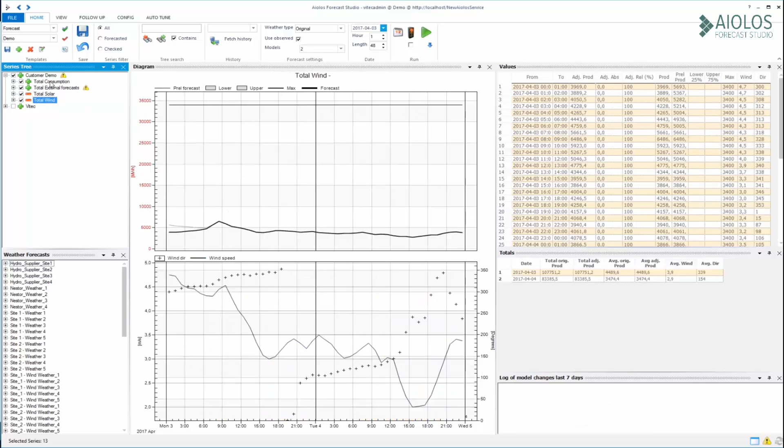But let's take a look at this consumption forecast. The consumption forecast itself contains forecasts made in different geographical areas, area A and area B. And each of these consists of different forecasts.

In this case we've made the same forecast, the forecast for area A, but we made it in two different ways. We've used the calculation model Aiolos for one of them and the calculation model Cilia for the other one. Here you get to see them all in the same diagram, so you can compare what Aiolos thinks versus what the Cilia model thinks in this case.

And then you can weight these two together. So in this case we have 60% of the Aiolos forecast and 40% of the other. And this we have set manually, but you can let the system calculate what would be the optimal weight looking at a historic period and set these weights from that. And this could be internal forecast like it's today, but it can also be that you want one of them to be an external made forecast made in another system. So you can still use them like this.

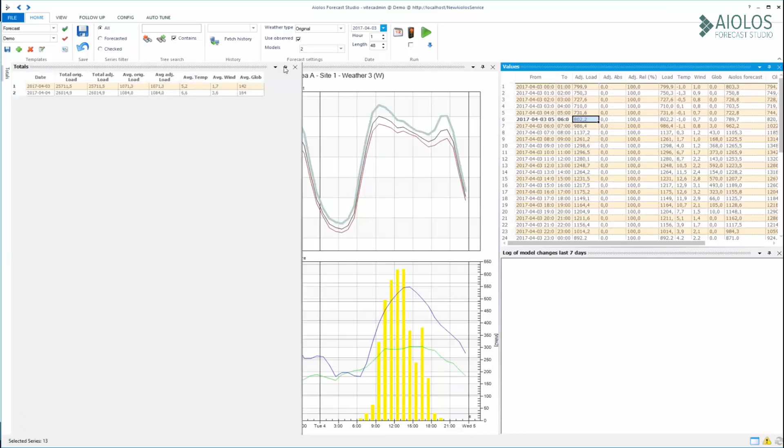But what we see here, everything is configurable. So let's say that you don't want to see the totals, then you can move them away like that. I pushed the needle button, and if you want to see it, you have it there, and if you always want to see it, you can pin it back again. You can also adjust all the windows, so if you want this to be larger, you can just make it larger. Or if you have multiple screens, you can rip this out of the rest of the container and put it in full screen mode if you want to see that instead.

So this should be able to optimize according to how you want to see it.

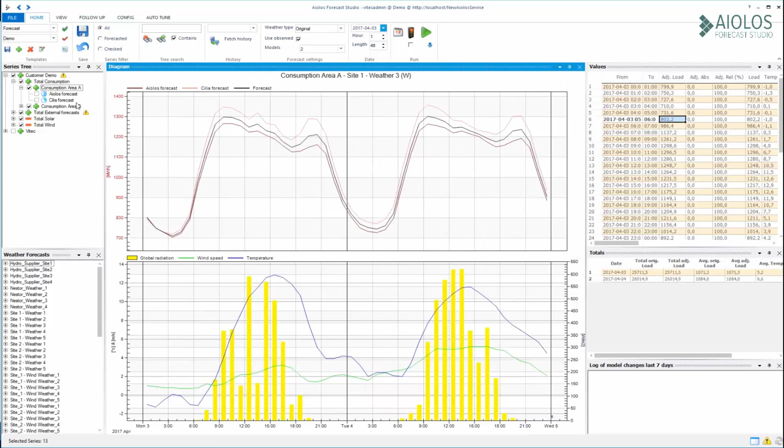But let's go forward then with the forecasting process, and let's say that you want to make this Aiolos forecast. So one thing that you might want to do when you made this forecast is compare it with the historic data, and then you can add this data. In this case we had real-time measured data, so we had data up until now. In many other cases it might be that we don't have data for the last days, weeks, or even months sometimes. So that depends on your setup and what you have. But Aiolos is supposed to manage all of that.

So here we took a look at the last 2 days, and we see that our forecast is quite high compared to those last 2 days. But we can take a look at the last 3 weeks, and then we see that, okay, the last 2 days was a weekend, a Saturday and Sunday, so all weekends are a bit lower. So our forecast is at least higher than that, but lower than the other weekdays over the last couple of weeks.

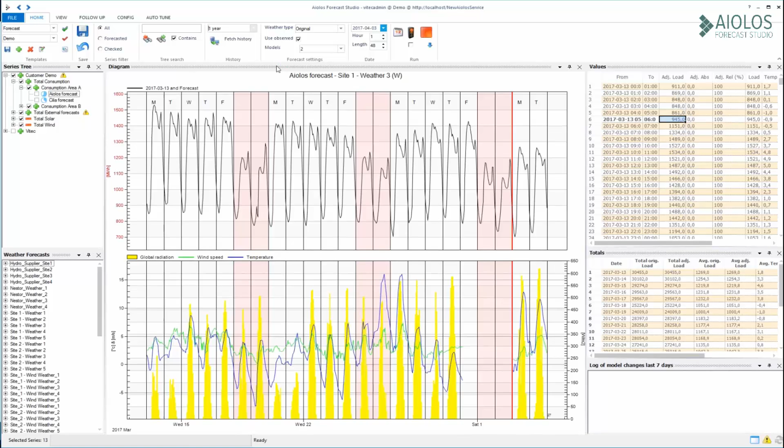So this is one way to look at the history, and if you then want to make any changes, you can do this directly here in the diagram. We can take a look at the history in another way, and I can show you. You can easily toggle this, and let's say that you want to look at the last year, you can just add that to the system as well.

But let's take a look at the history in another way. So we still want to look at the last couple of weeks, so the last 3 weeks, but we take a look at them and put the data on top of the forecast instead of in a long string before the forecast. So here we see 2 days of history, the 27th of March and 28th of March, the 20th and the 21st, and so on.

And let's say now that you want to change your forecast, you can just click and drag to mark an area, and then you can adjust that area for all values at the same time. You can also click to mark a smaller section if you only want to adjust this part, and then click and drag. And when you do these changes, you will see that the values are changing over in the grid. So if we try this again, you see the values changing over there. They are immediately updated.

And you can do the changes like I did here by clicking and dragging, but you can just as well do the changes here, writing them in relative terms. So I want 50% of the original forecast for that hour or for many hours, and then we see the change being made directly in the diagram as well. So you can change it by relative terms, or you can write the amount of megawatts that you want to change. Maybe we want to add 400 megawatts to this one, and that is possible as well.

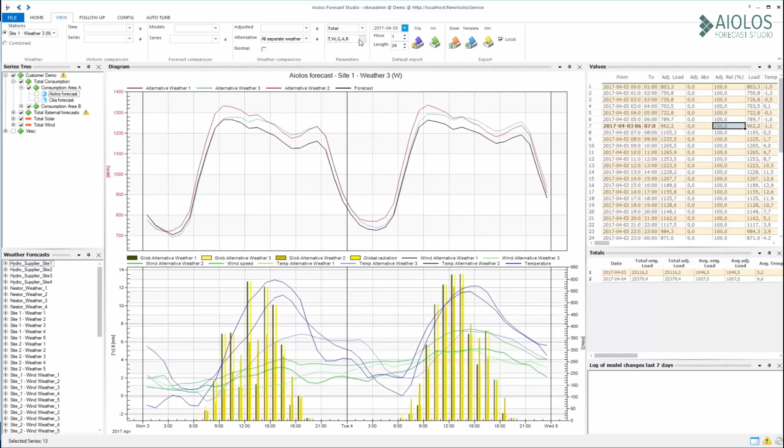But let's go back and change this weighting for this Aiolos forecast. If we right-click here, we see that the weights for the Aiolos forecast are 100% of weather provider number 1. But if we want to, we can add several intervals and have different weightings for different intervals.

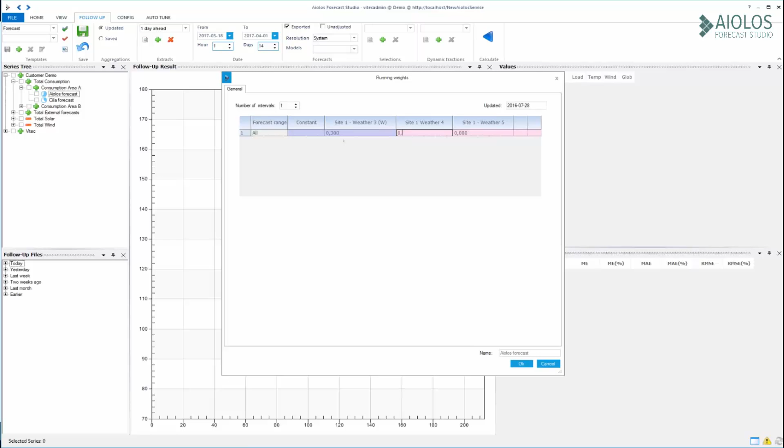But in this case, we can make it easy for ourselves and say that we do one optimization. So like that - now it's more evenly spread, and we get a save symbol, so we can save it.

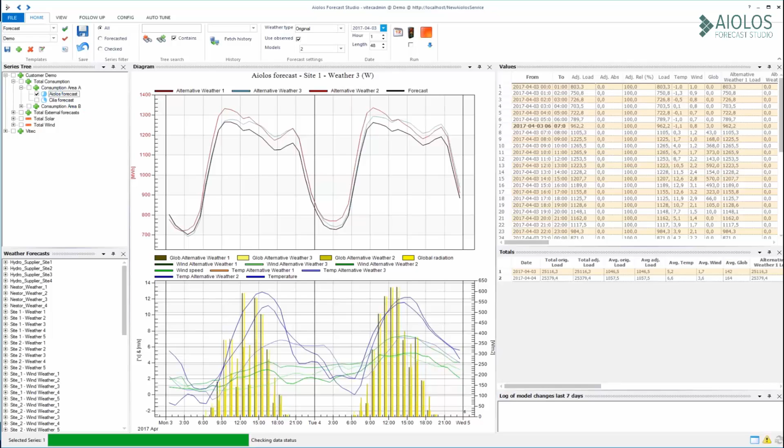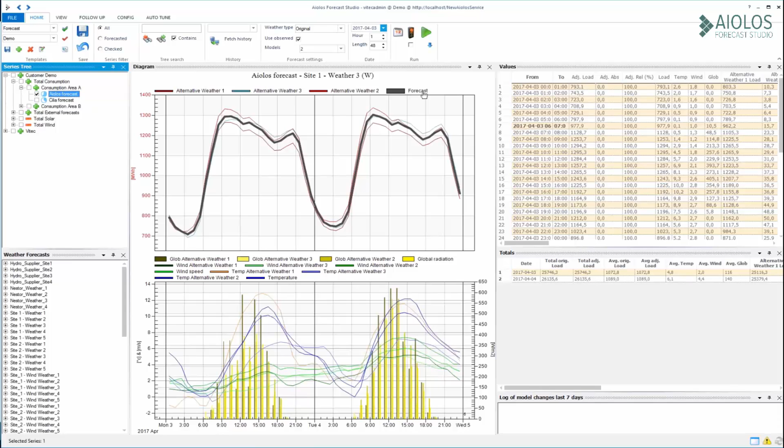So let's make a new forecast then for the Aiolos forecast. In this case now, before, weather provider number 1 was exactly the forecast, but now the forecast is more in the middle of all of these, as you see. So this is possible to do.

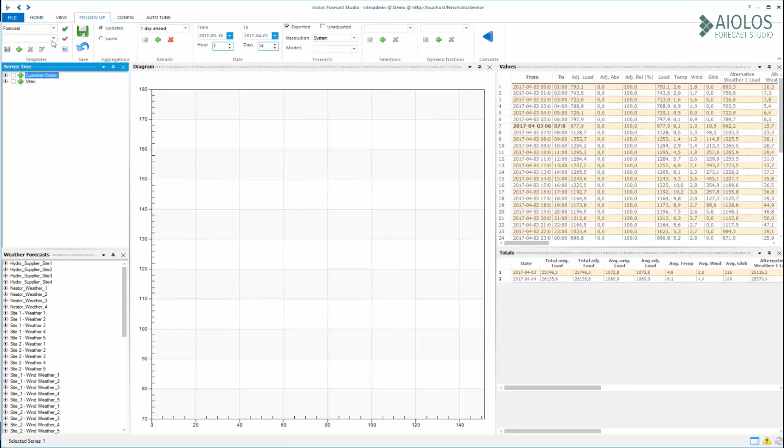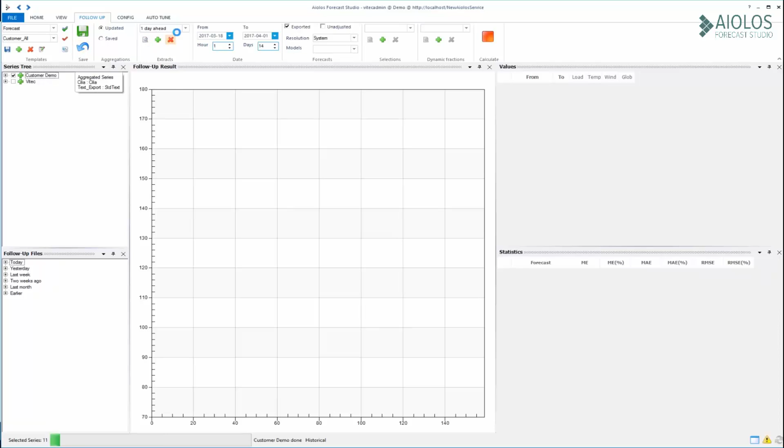Then I mentioned the follow-up as well, that we can do a follow-up inside the system. In this case we have different settings here, so I will take a look at the day ahead forecast. But this can also be the intraday forecast, 1 hour ahead, or 1 week ahead, or anything alike. And then we will take a look at 2 weeks' time during this period.

So now we see the day ahead forecast versus the measured data, and in this case it's quite a disaster, I would say. The forecast is quite bad, but that is the intention as well - because if you're here on the summed level, and it looks like this, that your forecast is way off the measured data, then you want to be able to zoom in and zoom down. So then you can take a look at the consumption, and this is, well, it's at least all right. It's not a disaster at least.

And in this case, we haven't imported the external forecasts for all hours. We have it intraday, but not day ahead. We have the solar that we can take a look at, and so on. But let's take a look at this consumption then.

So if we take a look here, then if we want to analyze something further, we can also mark an area and zoom in. So then we see the day ahead forecast and the measured data during that period, and we see here that we are zoomed in. And here we can scroll through different periods if we want to take a look at something else.

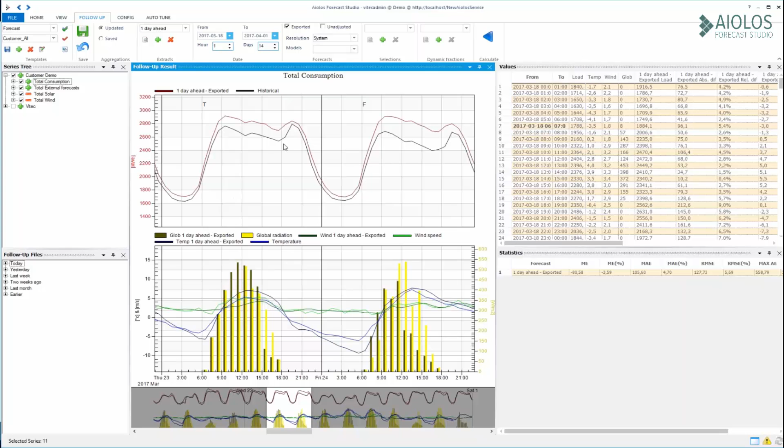And then we can make the analysis of the evaluation of the forecast. Besides evaluating this energy forecast, you can also take a look at what was the weather provider's forecast day ahead. You can compare the day ahead temperature forecast with the observed temperature, and from that you can analyze what might have happened if the forecast has been off.

Everything you see here you also have in a grid, and you get to see the statistics for this period. You can look at different measures, like what was the mean error, the mean absolute error, and the mean absolute error in percentage. You have different statistic measures that you can do this follow-up from.

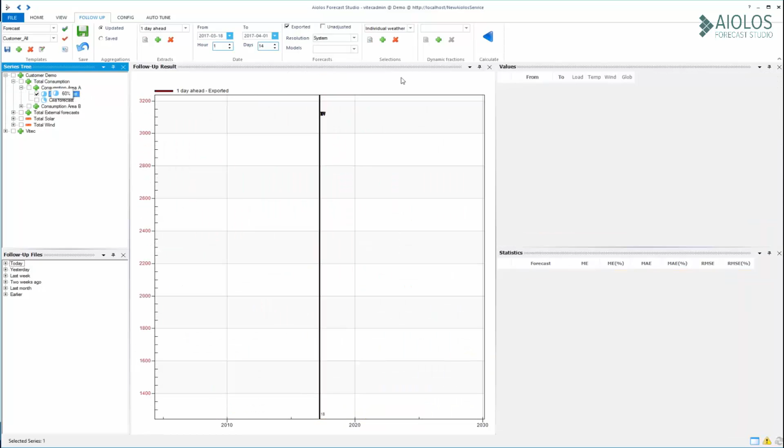So that was the quick follow-up. We can also take a look at this individual weather. Let's do this for consumption area A, the Aiolos forecast.

Here we get to see the energy forecast from each of these different weather providers - weather provider number 1, number 2, number 3, and so on. We can compare them directly in the diagram, but also here in the statistics, and see that in this case weather provider number 2 was the best one, weather provider number 1 had this error, and so on. So we can make a very quick evaluation of that as well.

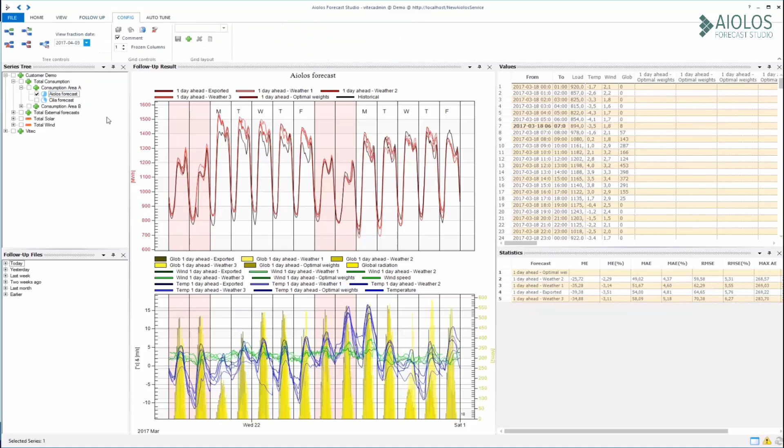Then, to work with the system, it's very easy to add a new series. So if we go over to - not your daily work maybe, but let's say you want to add a new series, then you can do that. So, my series.

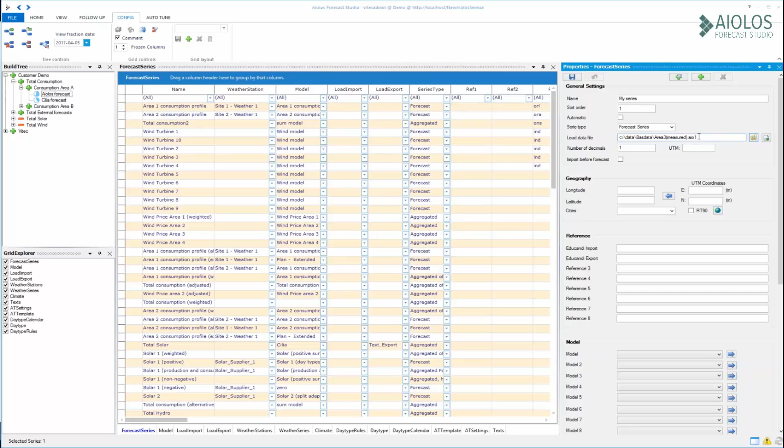Here I selected what kind of historic data I want for this series. Normally you want to set up a new series and then import data to it, but now I selected a file that has historical data from before. Then you want to select which calculation model you want - is it a Cilia model, as we call it in Aiolos, or have you written your own model. Do you want to export the forecast somewhere?

Do you want to import data? In this case, no. And what weather do you want? This normally is about what city, like for me it could be Stockholm, and from which weather provider - is it SMHI or YR, or which one is it. But let's select one of these here - site 1 from weather provider 3, and then save.

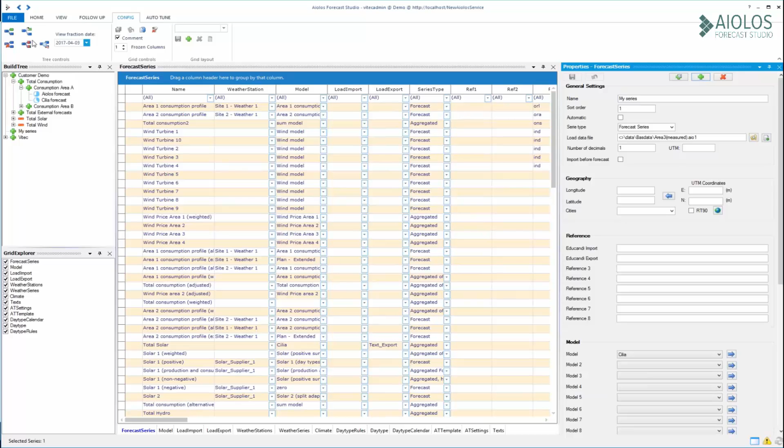When I save this, we see that it pops up here in the window - my series we have there now. If we go back to home where we make the forecast, we see that we now have this my series. If we select that series and push play, then we can see if we can make a forecast of it.

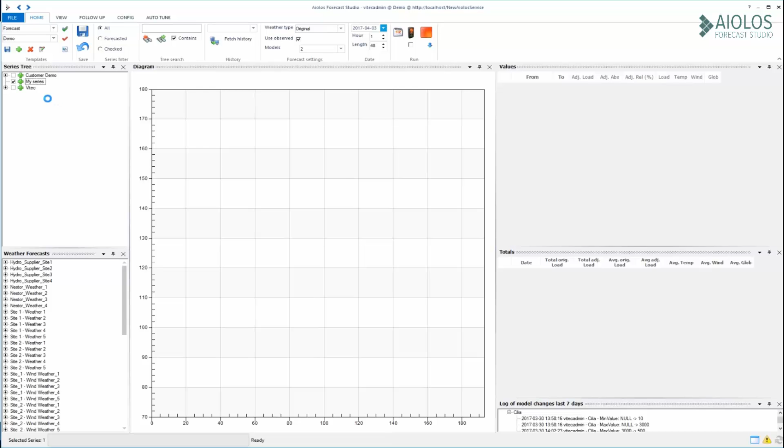What we haven't talked so much about is that every time I made a forecast, you've seen that it pops up a screen or a pop-up message. We can make the forecast for all of this again, like this, and this can help you keep track of your data status. In this example here, we have measured observed weather, which you need for your energy forecast, and weather forecast.

In this case, we see warning symbols for some of them - this is an example of that. If you would be missing weather observations, then you can get a warning like this, so you're alerted that something is missing in the system. This could also be for weather forecast or for measured energy.

So if something goes missing, you can get this as a warning in the system, but you can also get this sent out to you in an email or anything else, if you expect the weather for this time but you haven't gotten it.